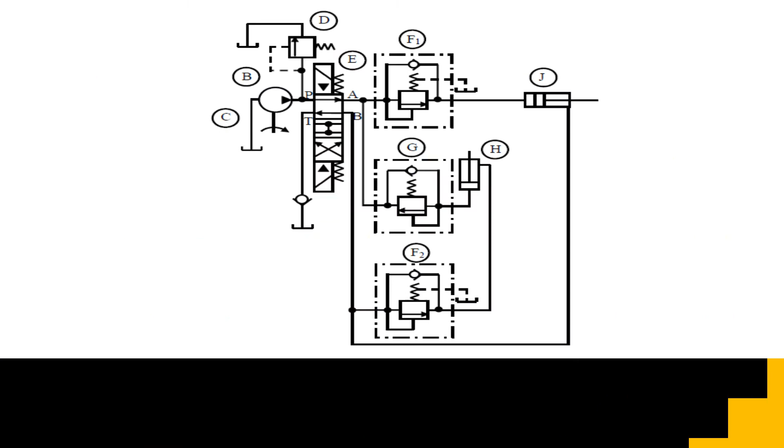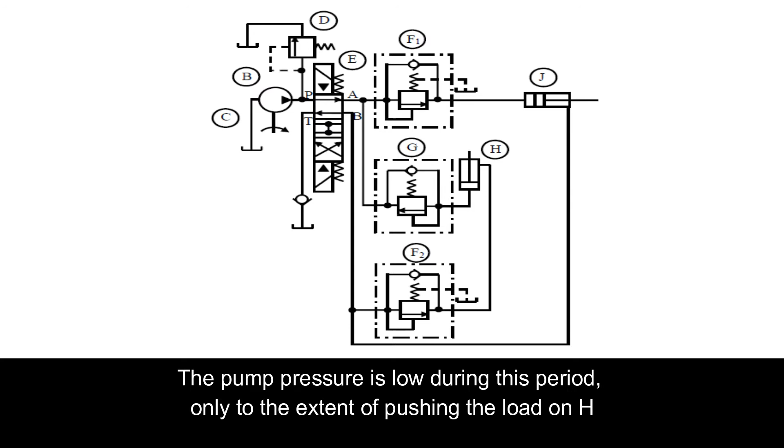Step A: pressing a push button starts the cycle and shifts directional valve E to the position shown. At first, the fluid flows through the integral check valve in G into the cap end of H and returns freely through the check valve in F2. The pump pressure is low during this period, only to the extent of pushing the load on H.

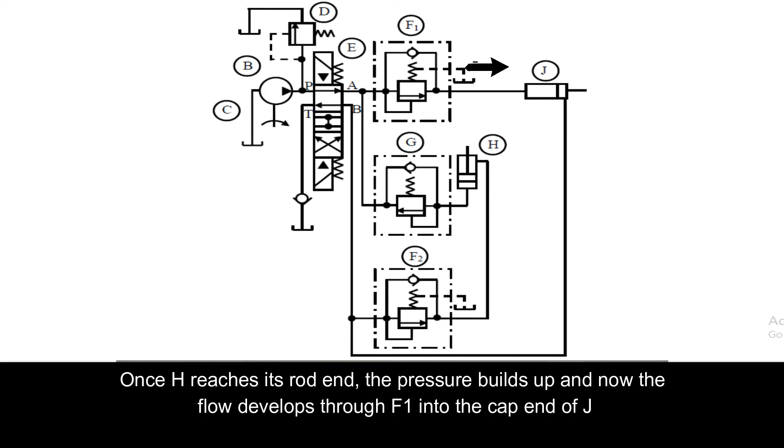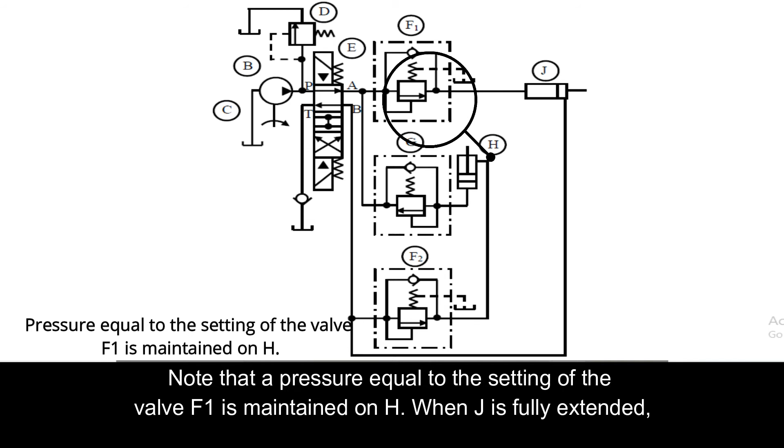Once H reaches its rod end, the pressure builds up and flow develops through F1 into the cap end of J, and out through the rod end back to tank through F2, E and C. Note that a pressure equal to the setting of valve F1 is maintained on H. When J is fully extended, pressure increases further and is limited by the setting of D, providing overload protection to B.

Next, we go to step C. Similarly, when the other solenoid of E is energized, the directional valve shifts to the other position as shown in this figure. Now pump delivery is directed through D, E and F2 into the rod end of J. As before, the flow out of the cap end of J flows to tank through F1, E and C. Step C is illustrated in this figure.

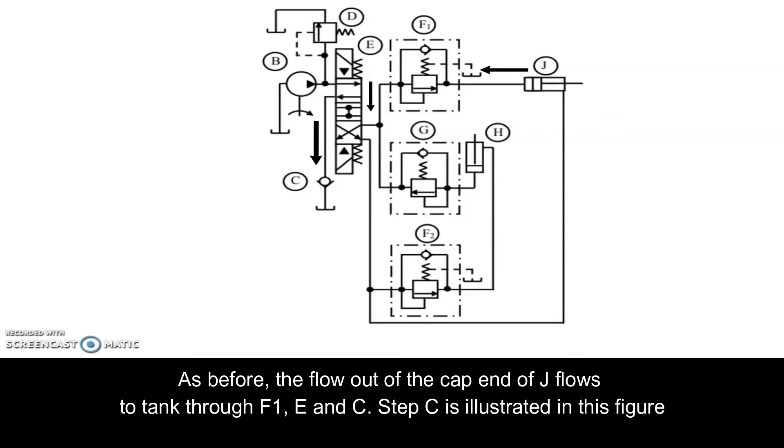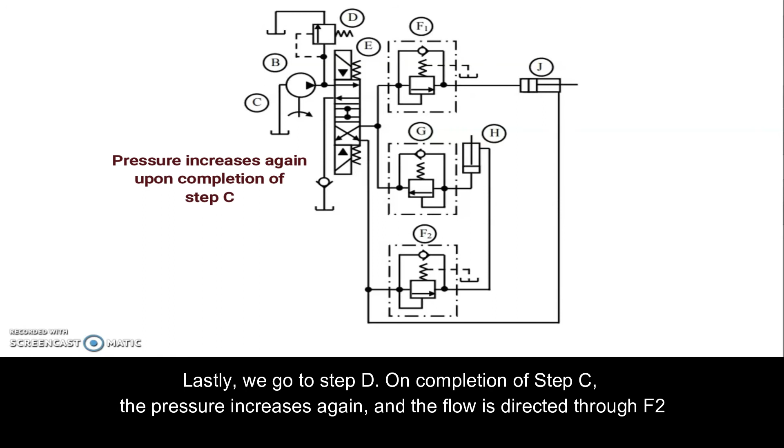Lastly, we go to step D. On completion of step C, the pressure increases again and the flow is directed through F2 to the rod end of H, and out through the cap end to flow into the tank through valve G at its pressure setting, and then freely to tank through F1, E and C.

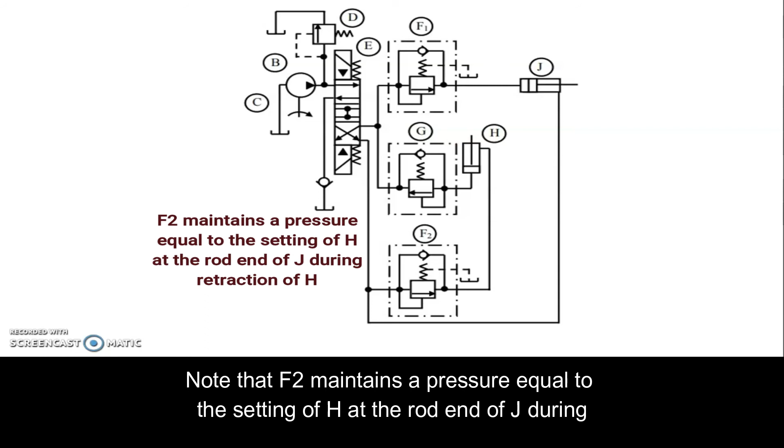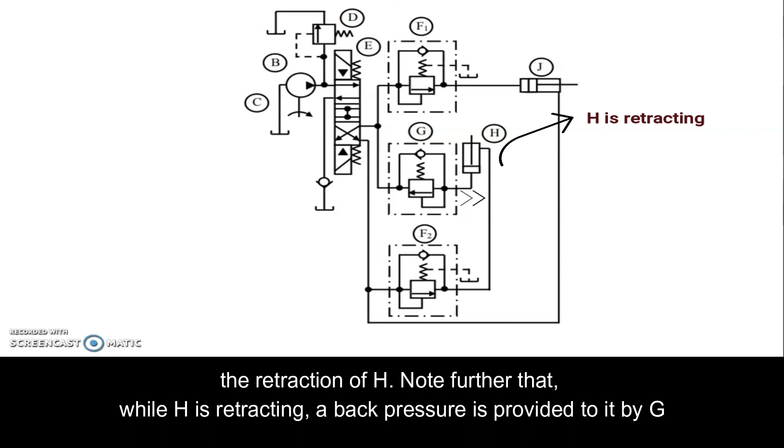Note that F2 maintains a pressure equal to the setting of H at the rod end of J during the retraction of H. Note further that while H is retracting, a back pressure is provided to it by G, to prevent rapid falling of the load during lowering under gravity.

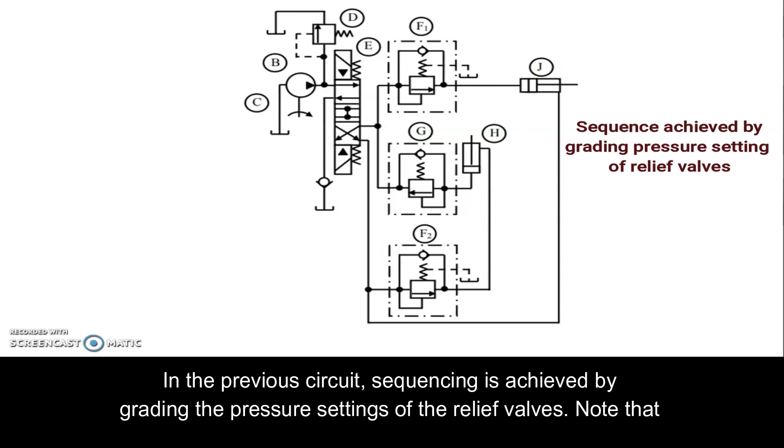In the previous circuit, sequencing is achieved by grading the pressure settings of the relief valves. Note that sequencing can also be achieved electronically by PLC control of the solenoids of separate directional valves driving H and J.